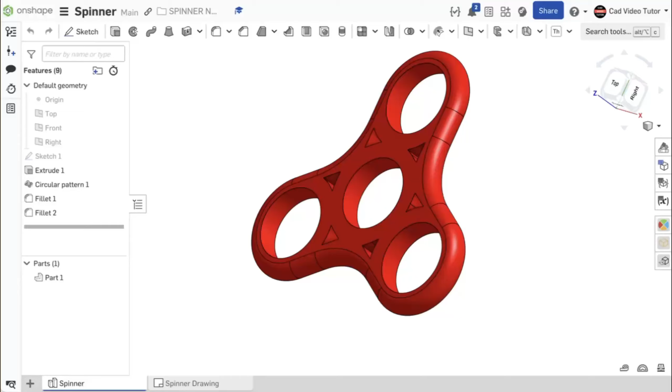This video provides easy-to-follow instructions for you to create this spinner using Onshape.

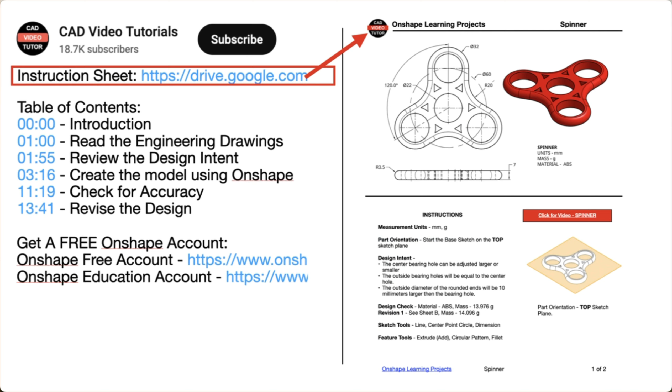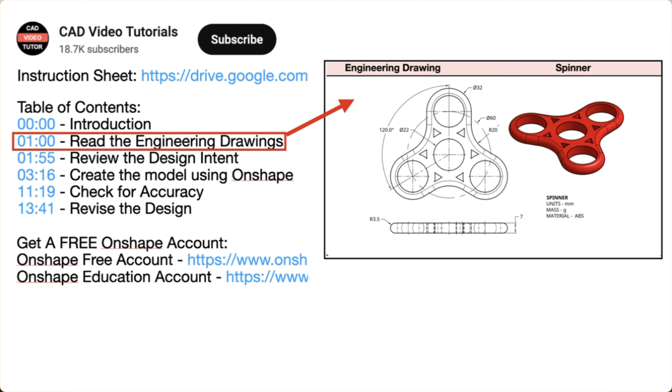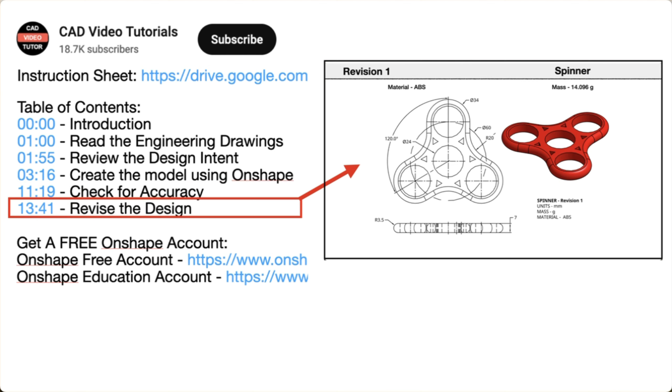The video instruction is organized into 5 segments. In Segment 1, you will read the engineering drawings. Segment 2 will establish the design intent. In Segment 3, you will create the part model using Onshape. Next, you will check the accuracy of your model by checking its mass properties. Last, you will check the design intent by making changes to the model to see if it will update correctly.

Now you are ready to begin the project. In this segment, we'll read the engineering drawing for this spinner. Let's start by identifying the views provided in the drawings.

First, there is an isometric view showing the spinner as a 3-dimensional pictorial. Next, 2 orthographic views: on the lower left, a front view. Projected directly above the front view is a top view.

When creating the parametric model, we need to identify the basic shapes and included features. The top view shows the part as a circular pattern with features concentric to the center. Located at the center is a circle. Patterned evenly about the center are 3 sets of concentric circles. The outer circles are joined by tangent arcs.

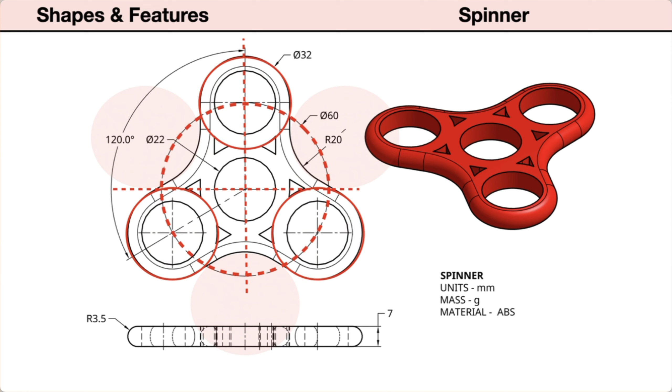The hidden lines in the front view show all of the holes extending through the body. It also shows that the spinner has a uniform thickness, and the outside edges are fully rounded.

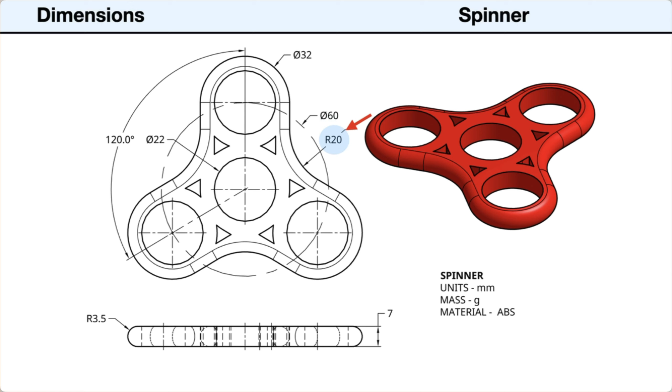Next, we'll look at the dimensions and notes. First, the dimensions are in millimeters. The diameter of the small circles are all 22 millimeters. The outer circles have a diameter of 32 millimeters. The centers of the outer circles are coincident to a center line circle with a diameter of 60 millimeters. The outer tangent arcs have a radius of 20 millimeters. The thickness is 7 millimeters. The fillet on the outside edge has a radius of 3.5 millimeters.

The material is ABS plastic. The mass is measured in grams. Next, let's establish our design intent.

To start, we need to identify any features that might be changed or revised during the design process. The center bearing hole is sized at 22 millimeters to fit a standard ball bearing. The outer holes are sized the same so that they can also be fitted with bearings to add weight and momentum for spinning. We might need to use a different size bearing, so this diameter might need to be changed by a few millimeters. This means that all of the bearing holes would then have to be changed.

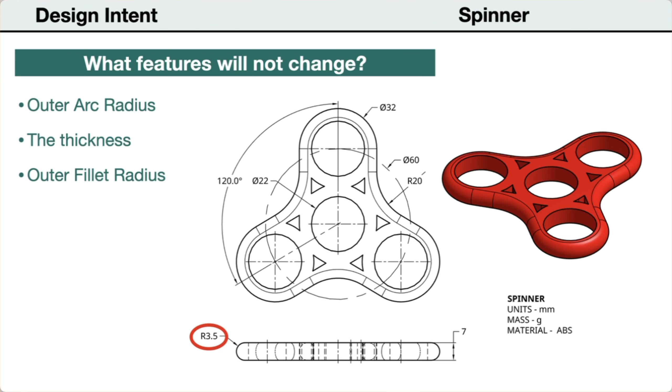If the bearing hole size changes on these outer holes, then the concentric circles would need to change by the same amount. Other features should remain unchanged, including the outer arc radius, the thickness, and the outside fillet radius. So we should be able to adjust the size of the bearing holes, and the other features will update without errors.

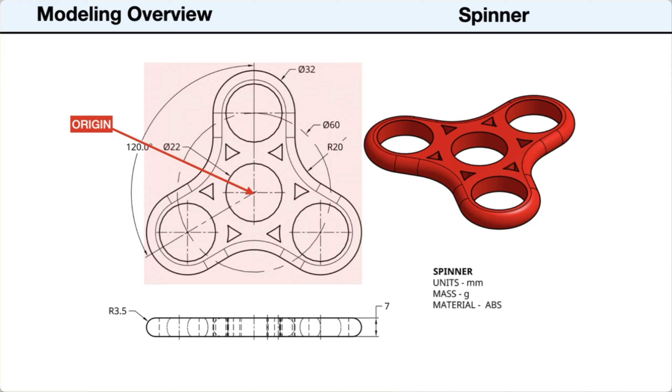Before we model the part in Onshape, let's preview the steps we will use in the modeling process. First, from the drawing, we will identify the profile we will use for the base sketch. In this project, the top view defines most of the elements of the design, so we will use it for the base sketch. Because this part is concentric to the center, we will use the origin at the center of the sketch. So sketch 1 is placed on the top sketch plane and defines the center hole and one set of the pattern elements. Extrude 1 will add the thickness.

Circular pattern 1 will duplicate and add the additional features around the outside. Fillet 1 will add the arcs to the outside. Fillet 2 will round over the outside edge. Now let's get started modeling the spinner.

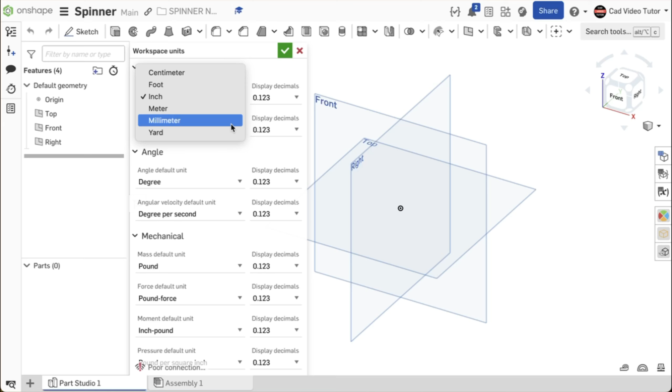I have started a new Onshape document and named it Spinner. The workspace units are set to millimeters and the mass is set to grams. Start a new sketch and click on the top sketch plane. Use N on the keyboard to view normal and P to turn off the planes.

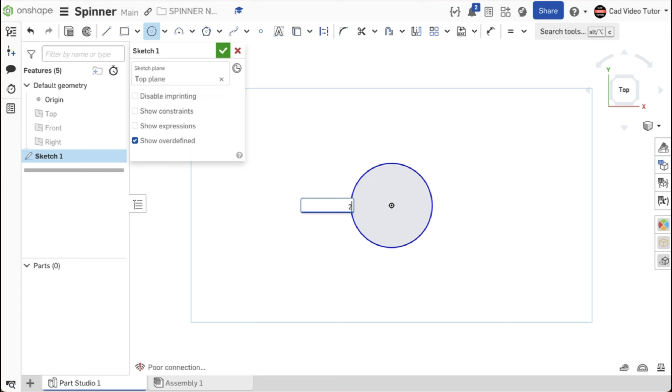I will start by sketching a center point circle concentric to the origin. Set the diameter at 22 millimeters. This is the size of the bearing hole. Create another larger concentric circle. This diameter is 32, but I want to set its size to change if the inner circle changes.

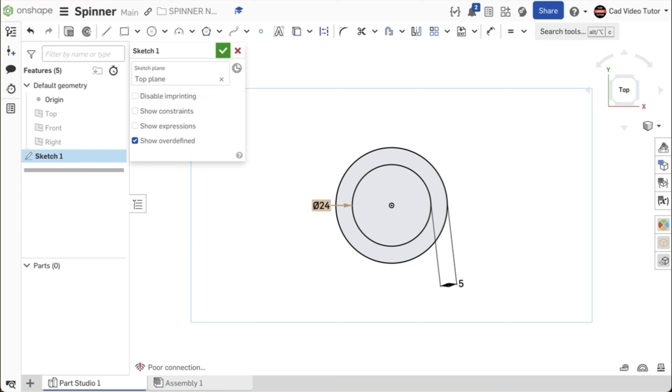To do this, use the dimension tool and set the distance between the inner circle and outer circle at 5 millimeters. Now, if I change the diameter of the inner circle, the outer circle will automatically update by the same amount. The dimension of the inner circle now drives the diameter of the outer circle.

Next, use a construction line to set the distance between the origin and the location of one of the pattern features. Make sure the line is vertical. Set the length to 30 millimeters.

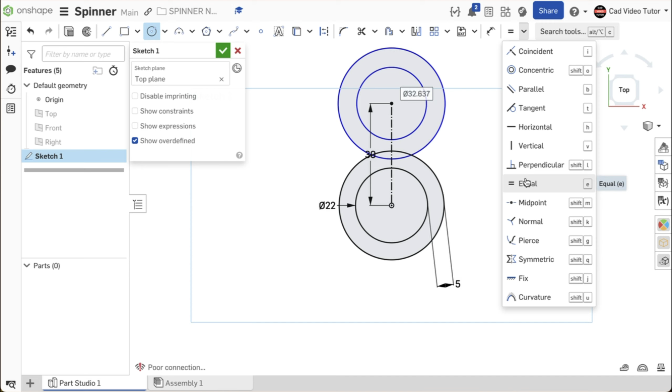Now draw another set of concentric circles coincident to the end of this line. To drive the diameter of these circles with the existing set, use an equal constraint from the constraint menu and click first on the dimension circle and then the outer circle to set it equal. Now if I change this diameter of the center bearing circle, it drives all the circles.

This will satisfy my design intent. Now we need some single lines. The line should start coincident to this circle and horizontal to the center. I see both icons, so click to start the line. The line should end at the same point on the circle.

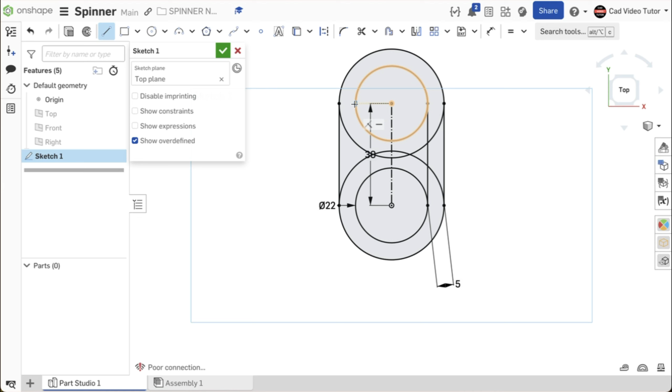If you click and hold the mouse button down, then drag to the line's ending point and let up on the mouse, it draws a single line. This is the fast way to draw separate line segments without having to start and stop the line tool. All the lines have turned black and the sketch is finished. Use the green check to accept.

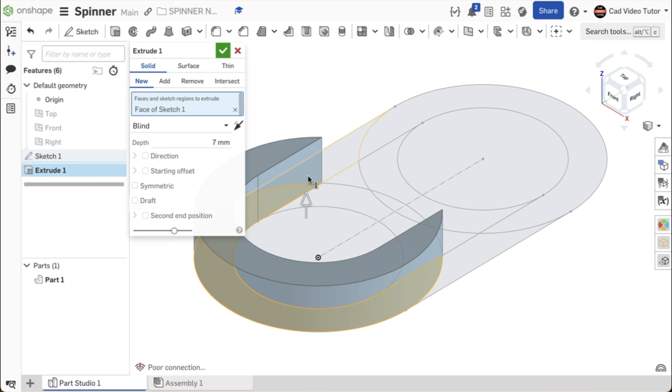Now we can extrude the regions of the sketch to create the base feature. Click on the Extrude tool on the feature toolbar. Set the depth to 7 millimeters. Click on the regions of the sketch that will be included in the base feature. If you accidentally click on a region you don't want included, click on it again to deselect it. This looks correct, so use the green check to accept the part.

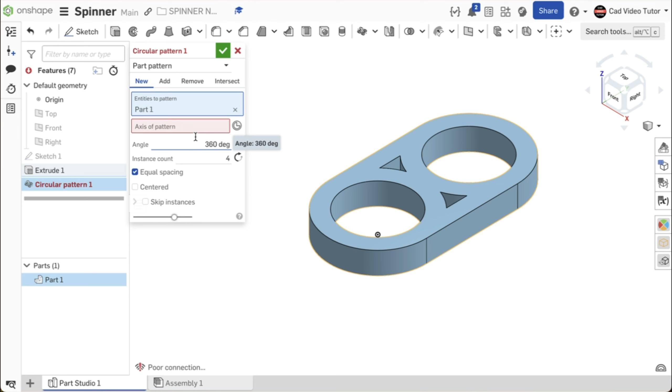Next, we can use a circular pattern to duplicate the base part about the center. From the feature toolbar, choose Circular Pattern. This will be a part pattern. For the entities to pattern, click on Part 1 in the parts list. For the axis of the pattern, click on the edge of the bearing hole at the center. For the instance count, enter 3.

I can see the parts list showing 3 parts, so I need to click on Add to make sure they are merged into one part. This looks correct. Use the green check to accept.

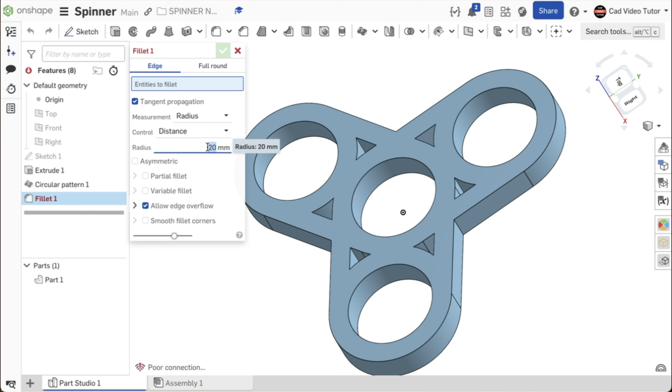Now we can use the fillet feature to add the arc on the outside edges. From the feature toolbar, choose Fillet. This will be Edge Fillet. Set the radius to 20 millimeters. Click one of the edges at an outside intersection. This looks correct. Use the green check to accept.

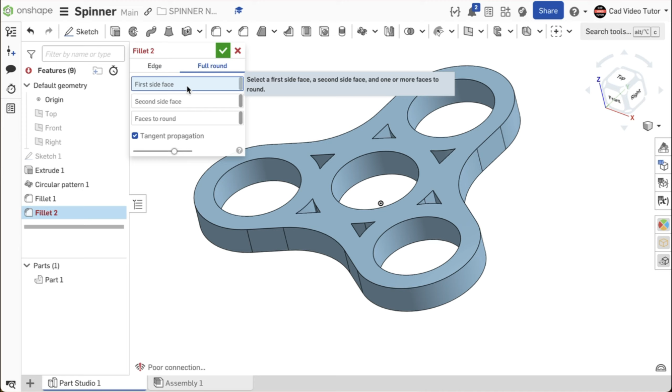We can use the fillet again to round over the outside edges. Again, click on Fillet from the toolbar. This time click on Full Round as the fillet type. This rounds the surface between 2 faces, so we have to choose the faces. Click on the top face and then the bottom face. Last, click on the face of the edge.

With tangent propagation turned on, it will find all tangent faces and create half-round edges. This looks correct. Use the green check to accept. The spinner is now complete.

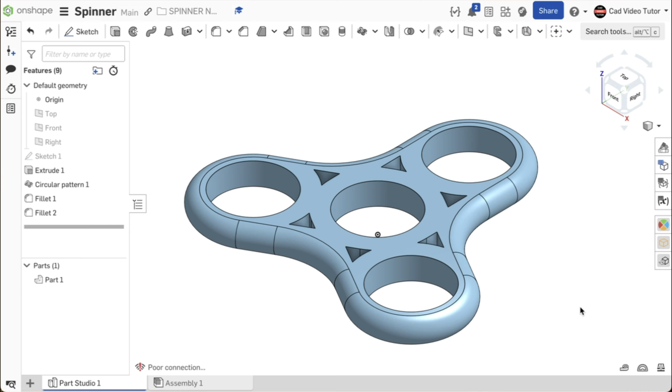In this segment, we'll check the accuracy by checking its mass properties. To check the model, the mass units should be set to grams and the material set to ABS. If the size and shape of your model was completed accurately, the mass should be 13.976 grams. Let's look at this process step by step.

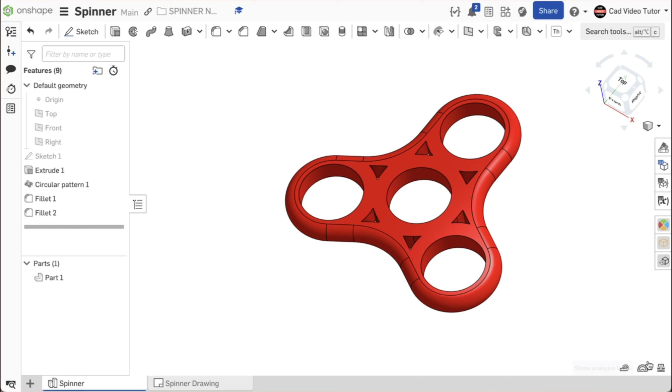First, open the document that contains the model of the spinner. Next, check the workspace units and make sure that mass was set to grams. Next, set the material to ABS. Go to the part in the parts list. Right-click and choose Assign Material. In this case, we're searching for ABS. Click to select it. Next, go down to the lower right corner and click on the Display Mass Properties button.

When the dialog box opens, click on the part, and the display shows a mass of 13.976 grams. If this was your result, then your part is accurate and matches the specifications. If not, we can troubleshoot to locate the sketch or feature that has an error.

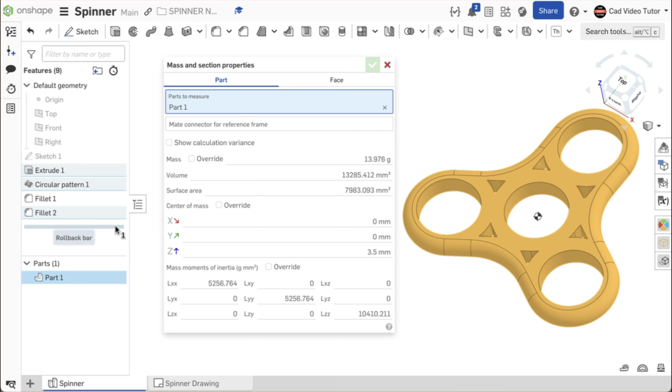First, locate the rollback bar in the feature list. Move the rollback bar up to just below Extrude 1. The mass now reads 7.164 grams. If you have an error here, examine Sketch 1. Now move the rollback bar down to below Circular Pattern 1. The mass is now 14.962 grams.

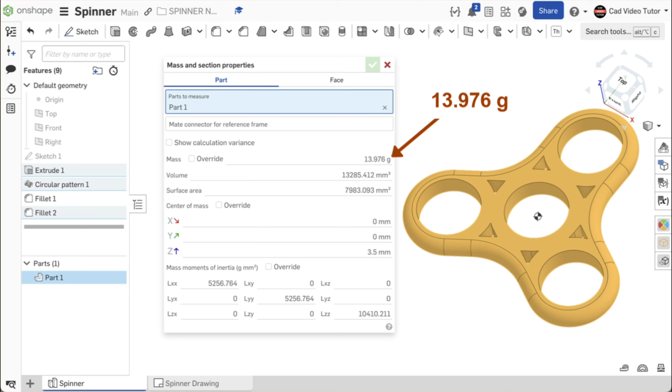Next, move the rollback bar down to below Fillet 1. The mass is now 15.437 grams. Move the bar to the end. Again, the mass should be 13.976 grams. If your amount still doesn't match, check Fillet 2 and make corrections. Your part should be accurate and meet the drawing specifications.

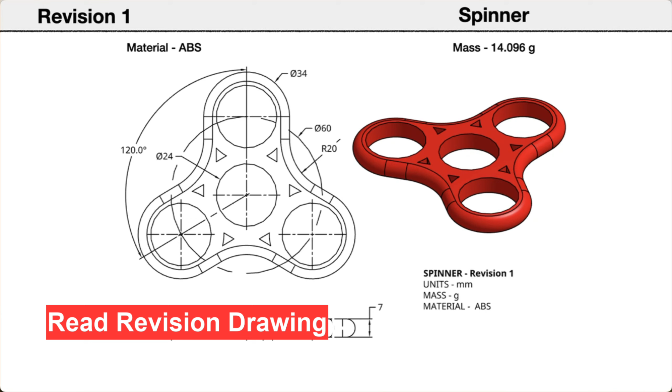In this segment, we will make some revisions to the design and check if our design intent has been applied correctly. We will start by reading the revision drawings to identify the features that will be changed. The drawings show the center bearing hole has changed to 24 millimeters. Also, the outer diameter has changed to 34 millimeters.

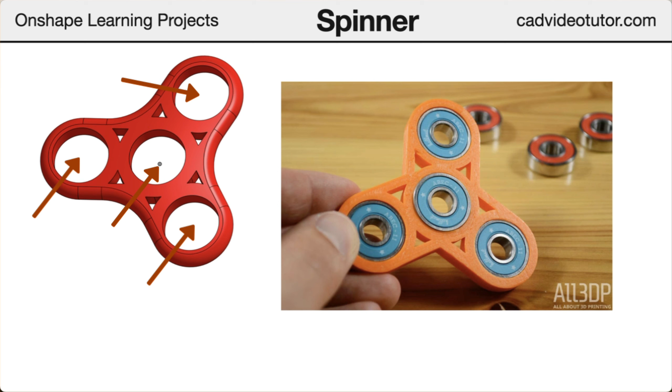In the design, the outer holes are set to receive the same size bearings for added weight. In our model, we have set constraints so that the size of the center bearing hole drives the size of all the bearing holes and the outer diameters. To make the revisions, open the spinner document. Open Sketch 1 and change the center hole diameter to 24 millimeters.

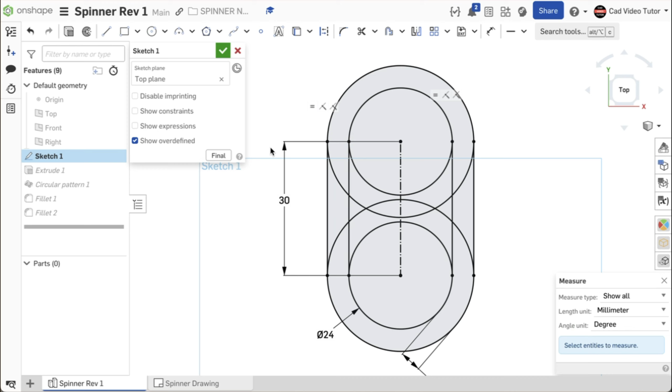Use the measure tool to check the size of the outer bearing hole. Yes, it has updated to 24 millimeters. Check the outer diameter. It should be 34 millimeters. The distance between the center and outer bearing holes remains at 30 millimeters. Click the final button to see the update. This looks correct without any errors in the feature list.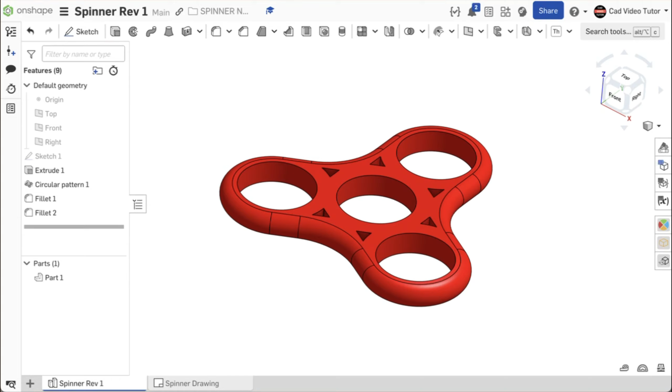Check the accuracy of the revised part by viewing its mass properties. The new mass should be 14.096 grams. If your part updated correctly, the model has met the design intent and it was revised to receive a larger size bearing. If your part didn't update correctly, check constraints used in Sketch 1.